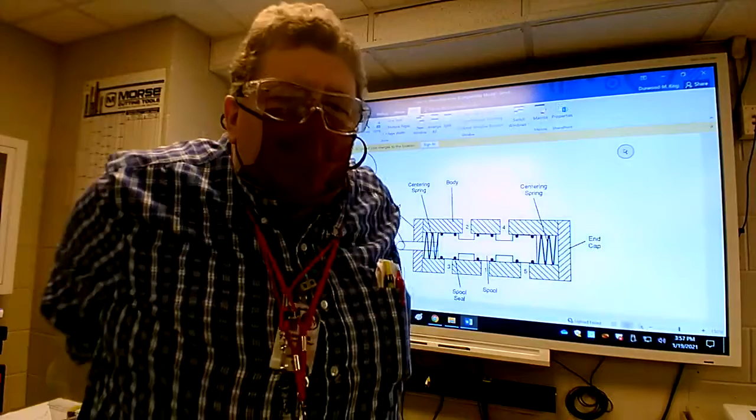This is an example of it, and it has three positions: a neutral position, and then away from the body and toward the body. So this can make a cylinder extend and retract, or it can make an air motor turn in two directions. So we're going to be taking a look at the sticker that's on here.

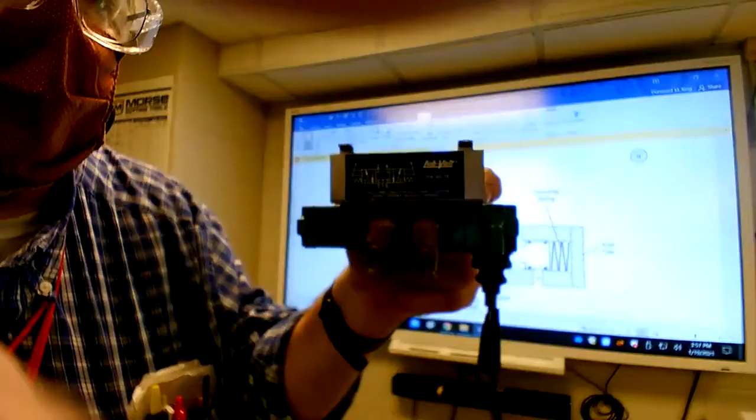What does that diagram mean? We're going to take a good look at what all of the things about that sticker mean. And what it boils down to is each block on here represents the flow path direction of the valve. How does the air flow through it and return through it in each of the three positions?

So there's three envelopes or three squares on there. You have a center position, which is when you release it, and then you have a left and right position for extend and retract. And it's going to tell us the flow paths of the air out to your cylinder or air motor and then back through the valve to the exhaust manifold, to the exhaust mufflers.

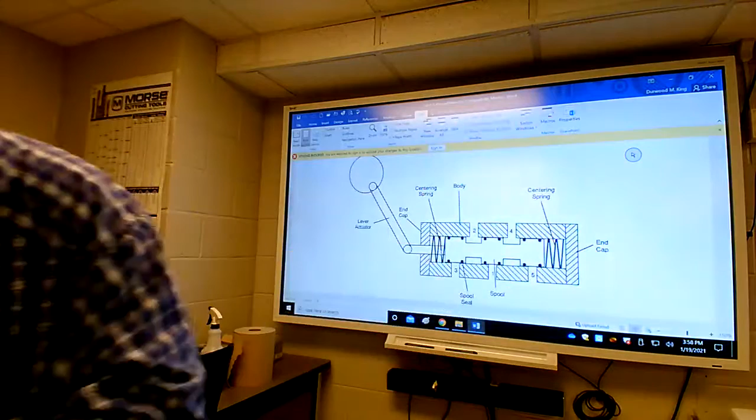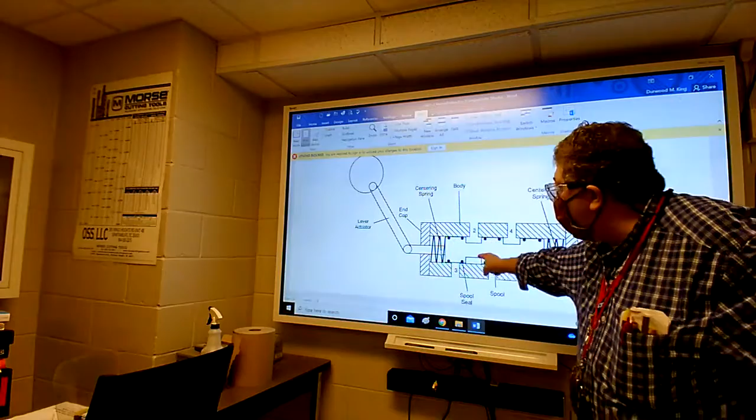That's the internal construction. And when we say it has a spool inside, that's a solid metal spool that gets shifted. And when it gets shifted, it changes what ports are connected to each other. It changes the flow path of the air.

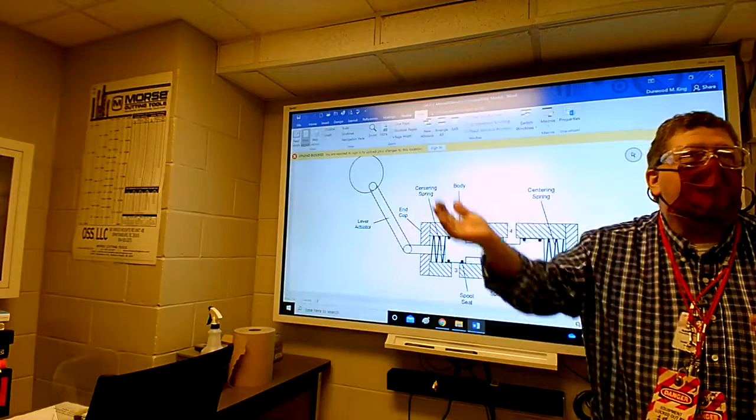Does the cylinder that it's hooked up to go out, or does it come home? And how does the air return from the other end of the cylinder back out the exhaust ports? All that stuff is determined by the position of that spool.

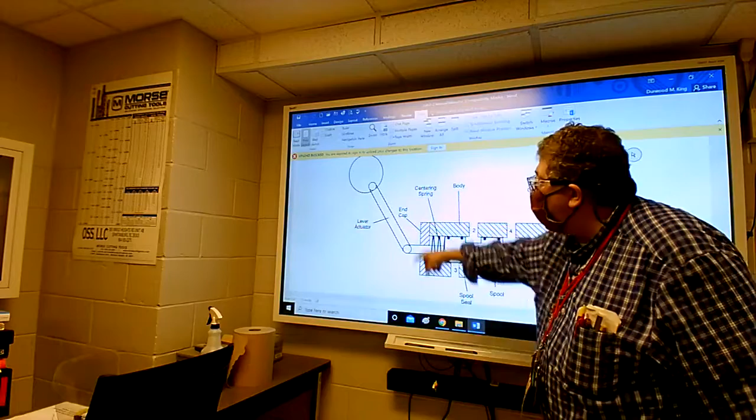And it's run manually here, whereas in labs coming up, it's going to be run electrically with coils. Electric coils are going to run it, going to control it, instead of you having to manually run it.

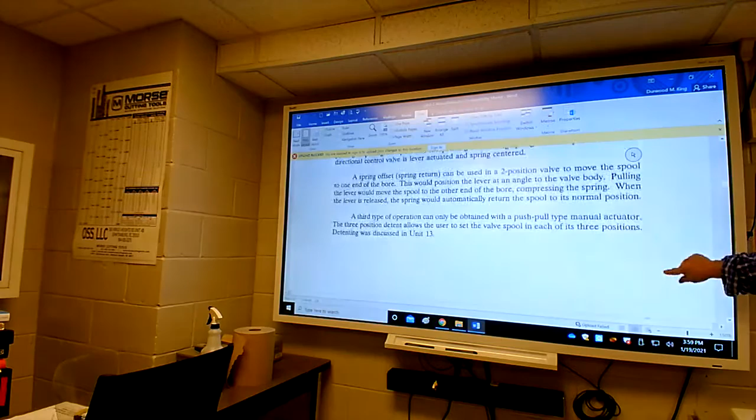Look very closely here. There are three different types of spools that could actually be in that same valve body. That same valve body can have three totally different types of spools inside of it.

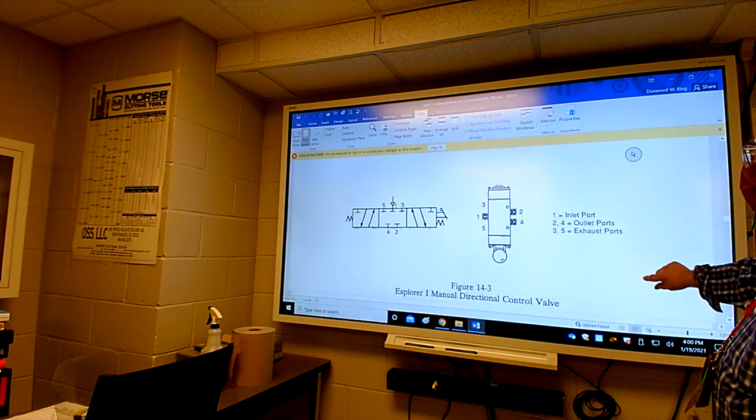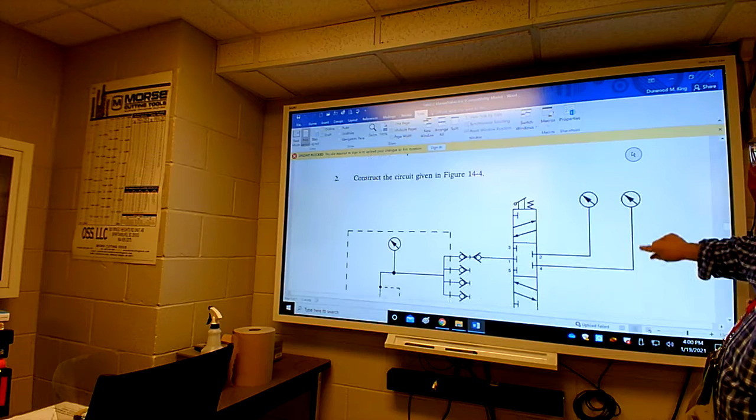So I'm flipping to your lab paper here. There's a picture of the valve that's on the trainer. That is a diagram, the little sticker that's on the valve. And this is how it's actually hooked up. This is the way you're going to hook it up.

So look closely up here. Does everybody have that on their paper where you can see it?

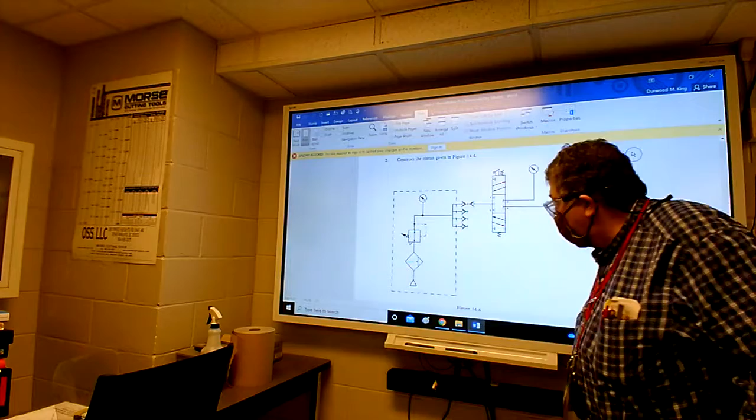Now the dashed line is the trainer unit itself, the enclosure that holds the air components. Down in here would be where the air source comes in, and each unit out there has a little compressor down in there that we don't use.

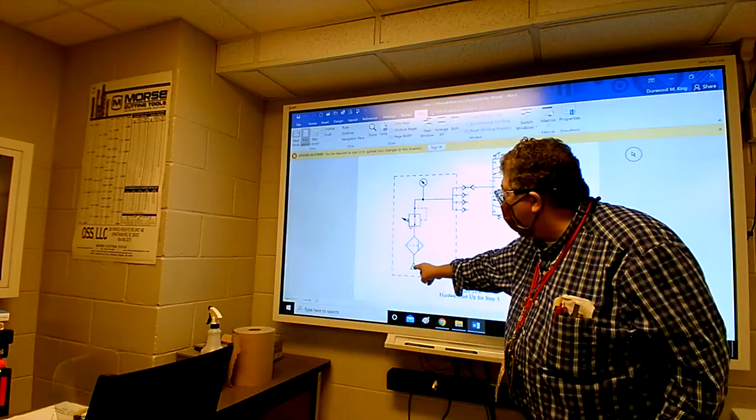We started having some problems a few years ago with those little compressors, so Mr. Meredith decided to just tie in all of those to the big compressor up here. The class he was in actually ran piping. So we're just going to cut the main compressor on that's up here with a switch outside the door, and it's going to provide the main air supply going into the trainer.

Now, on your display up there, you're going to have a filter. This symbol here, if you flip your paper to the side, those symbols are drawn vertically. Now, what I would do, just so you can make more sense out of it, take your paper and flip it like this. Okay? And when you do that, here's what you have.

That second symbol right there represents—now, when we get into chapter 2, we're going to be looking at symbols, and I've got a symbol handout to give you, but I didn't want to overwhelm you with too many symbols at one time. But what this symbol here represents is a filter unit that filters the air. The little dashed line in there would represent like a filter element, like an oil filter, but it's an air filter.

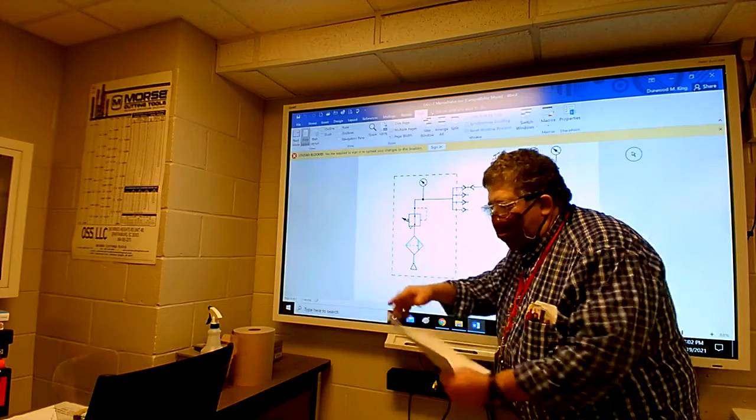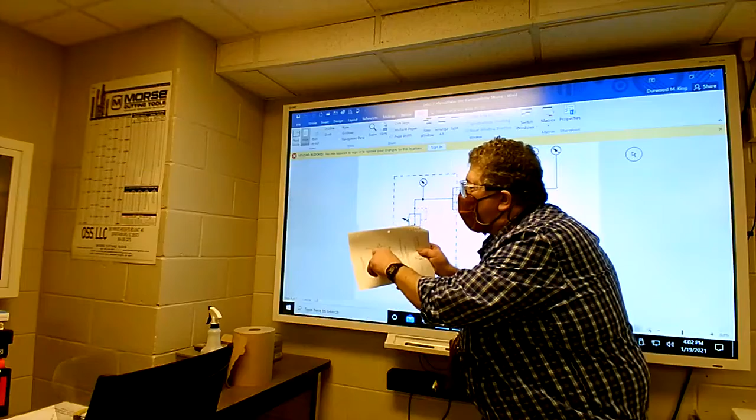Everybody's got air filters on the vehicle, right? So your air filter would be the dash line portion of it. And down here at the bottom, if you flip it like this, it's a filter that actually has a drain too. It has a valve that can be opened up to drain liquids that end up in the air. Say there's condensation in the air coming from the compressor up here, condensation in the air line. When it gets down to here, it can actually be drained out of that clear filter bowl.

It's a clear bowl that has a filter element in there to catch solids. The dash portion catches your solids, your particles, solids that are in the airline. Maybe somebody's done some pipe welding and there's some weld slag in a pipeline. So weld slag that gets carried through the lines, this dash line would actually capture that weld slag before it could get in the machine and damage our cylinder seals and stuff.

And then the bottom portion of it, if you hold it like this, is a gravity feed bowl that lets your oils and liquids settle at the bottom and be drained out so that it doesn't get into your machinery. So that's your filter there and drain. And then here would be an air regulator.

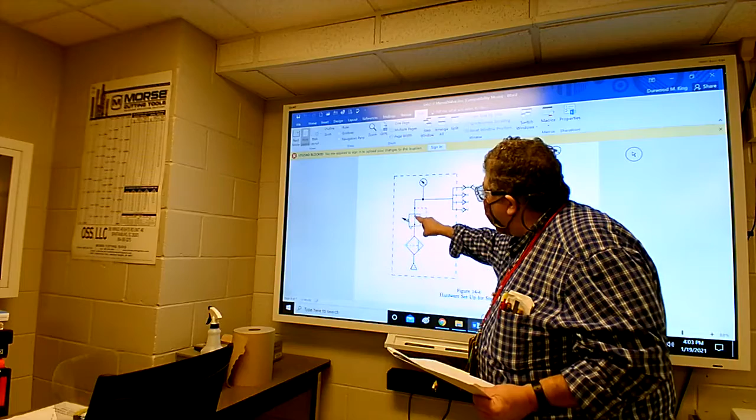So that symbol there, what it represents is when you hold it, let's see if maybe I can rotate this. Let's see if it'll let me rotate. I'm not sure if Word will let me do that. I don't see a way to rotate that image there because it's a Word document.

But what I'll do is show you over here the meaning behind that regulator symbol. How do you understand what we're looking at? It's an air regulator.

So I'm going to draw that same symbol horizontal instead of vertical. I'm going to flip the paper like this, and I'm going to draw the regulator. I'll draw the filter too. And here you have the dash line for the filter element itself, and then there goes the drain. That's your air supply coming in.

And then we go over here to the regulator. So the regulator is a box, and it's actually a thing that has a knob on it with an adjustment to adjust the air pressure that you're going to set. You're going to have to set this regulator yourself out there on the machine. It doesn't look like that physically. It's just got a knob, a black knob on it, and a round body with a knob on top. But the schematic symbol for a regulator is this.

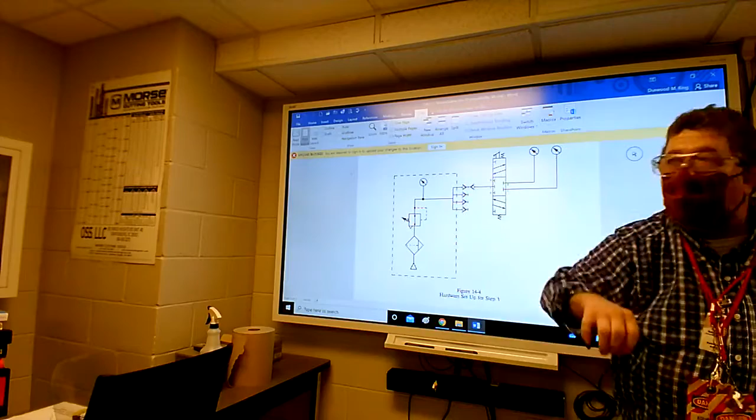So when you plug them in, those little balls open. When you put the hose on the manifold, the check ball on the hose and the check ball in the manifold both open, and air will flow out to the valve. Make sense? And if you pop the quick connect loose, both of the balls will reclose.

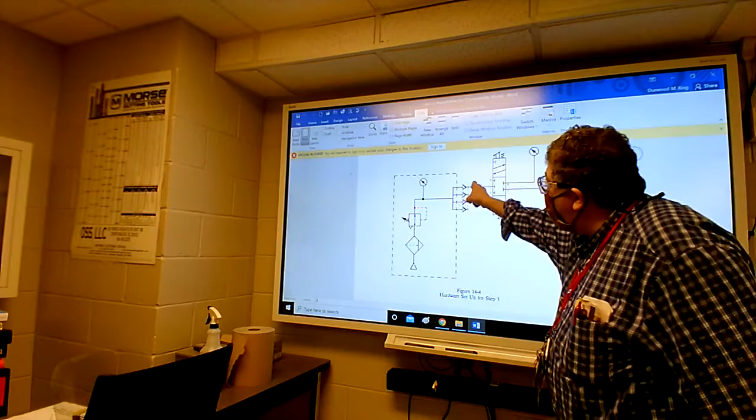You'll hear a little spurt and it'll close. Okay, so let's take a look at the valve itself.

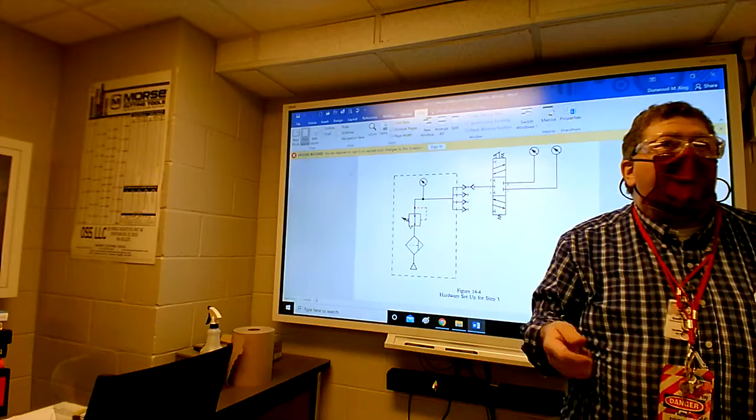Your air line is going to go into the center port, which is port number 1, and then port 2 and port 4 are going to go to some air gauges to begin with, so you can see what happens as far as air pressure. Once we go through the experiment, you can change them. You can actually tie in a cylinder and see it run a cylinder or air motor.

So you go straight out of 2 and 4. That's what I call your working ports. Go to your air lines, and then 3 and 5 are going to be open to the atmosphere for exhaust. Now, in real life, there would be some small mufflers plumbed in there, and it'll shoot through the mufflers. But here it's just going to be shooting right straight out of the ports, to the air.

Just directly right out of there. And when it's like this, it's a little noisier. When the thing runs, you put mufflers on there, and instead of it going pow like that, pow, it silences like a gun, like a silencer on a gun. Y'all know about silencers on guns. If you don't want a gun to be so loud, they put a silencer on it. Well, that's the way they do on air valves. They put mufflers, silencers, on them, and it doesn't affect the operation of the cylinder, nothing matters, but it's better on the ears.

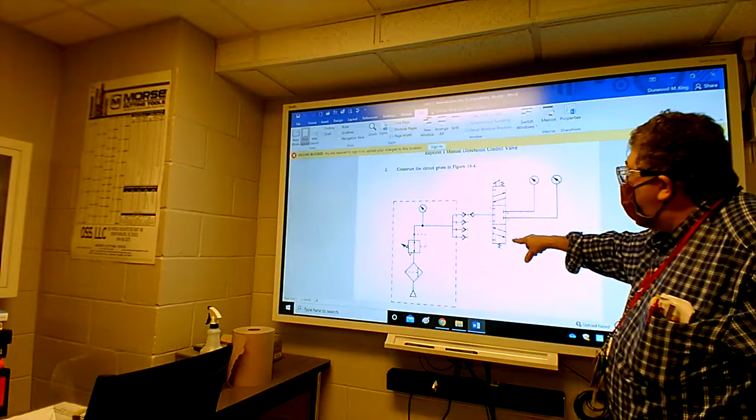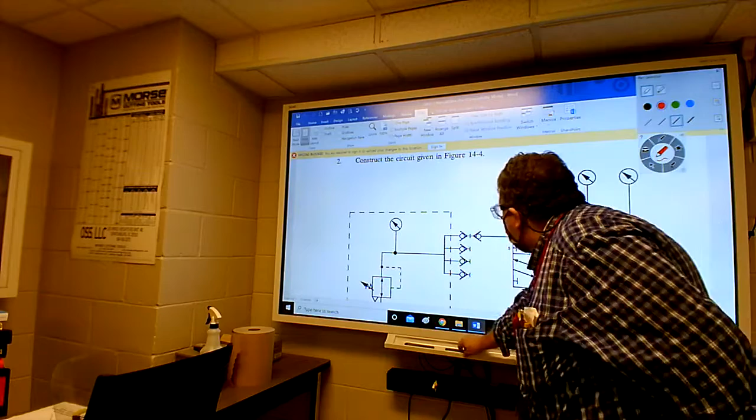Anyway, so this shows the diagram for the valve, and let's talk about what this means. So let's go a little bigger. And let's even add, I'll go as far as to draw a cylinder up there too, as well as the air gauges. So I'm going to draw a cylinder up here.

Now, so I've got a cylinder drawn in there. I've tapped it off of the lines for the gauges. And let's talk about what happens here.

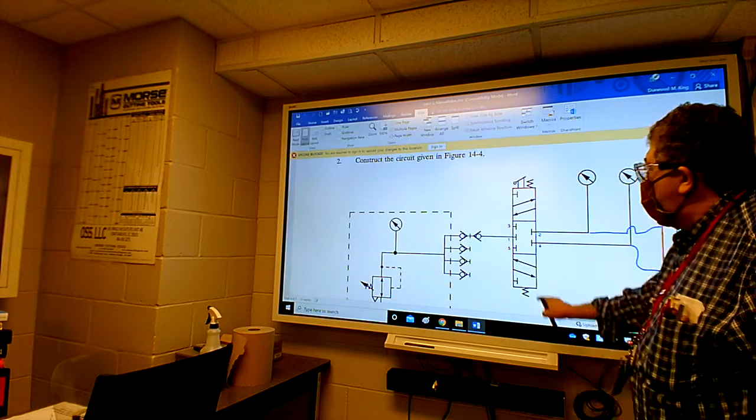Now, this valve is 3-position, and the first thing you want to talk about will be the center position, because this is called a closed center valve. On the closed center valve, it means when you let go of the stick, the springs make the spool go to the center.

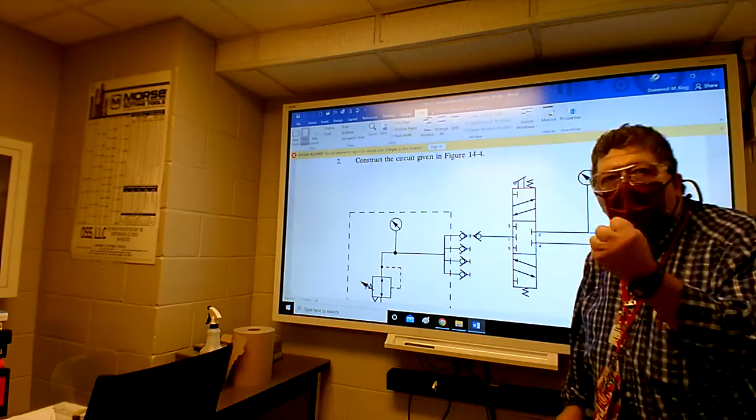And here's what happens: the air pressure coming into port 1 actually gets blocked, it's shut. And then the working ports that go out to the cylinder and the gauges are blocked too. So in the center position, all 5 ports are completely blocked, and the cylinder can't even float. The cylinder is physically locked because it can't float under load or anything. The lines are actually shut, so it's under an airlock too. It can't move. It physically can't move, can't even drift in the center position.

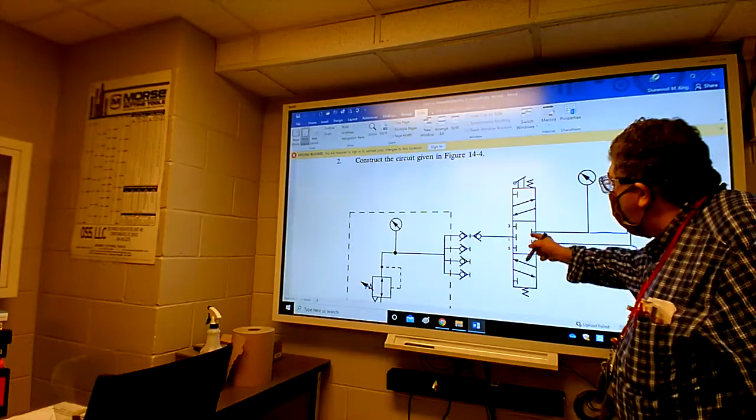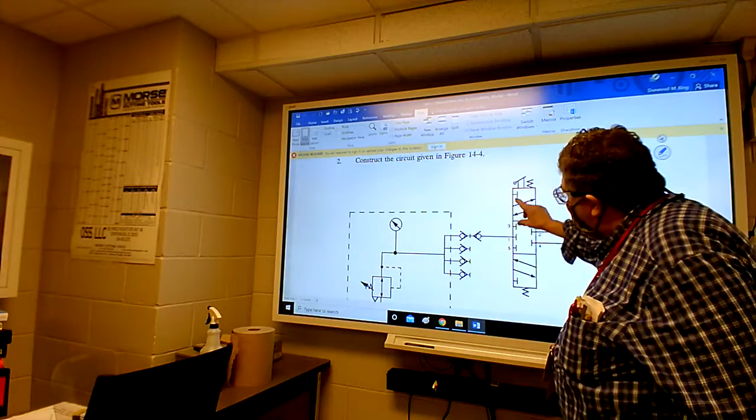Now, if you move the valve to one position, you end up with this scenario, or envelope, as they call it. So here's how you read these symbols. You take this line here, and this air line feeding that center up there. Instead of dealing with this now, you're dealing with this, not that. So let's draw it up here now. I've got the air line now shooting into here.

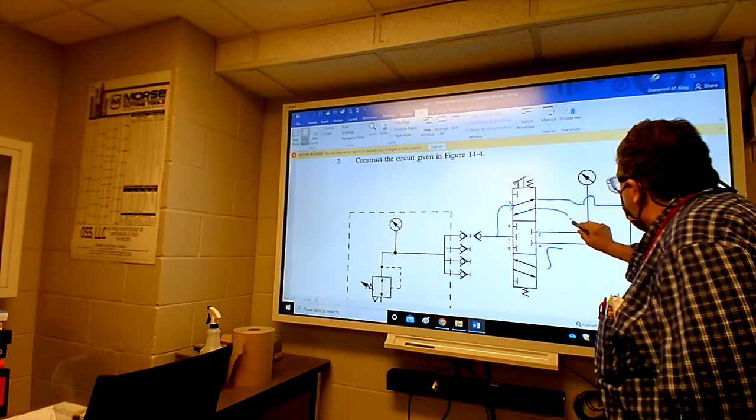Watch me real close here. So now I'm going to take your working ports right here, shoot it right over to here, and go into there. And this other one goes over to here, and now to the bottom of the cylinder.

So when you move that stick in one direction, here's what happens: the air line shoots into the center port, so these other 2 ports would be your exhaust. Those 2 outside ones, that's your exhaust, like 3 and 5. This is 3 and 5 in this scenario when you move the stick one particular way. Everybody got it?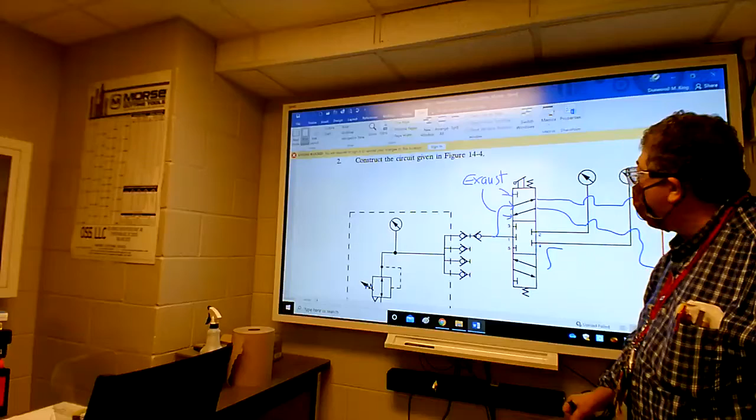So let's get rid of this, so I don't have too much clutter up in here.

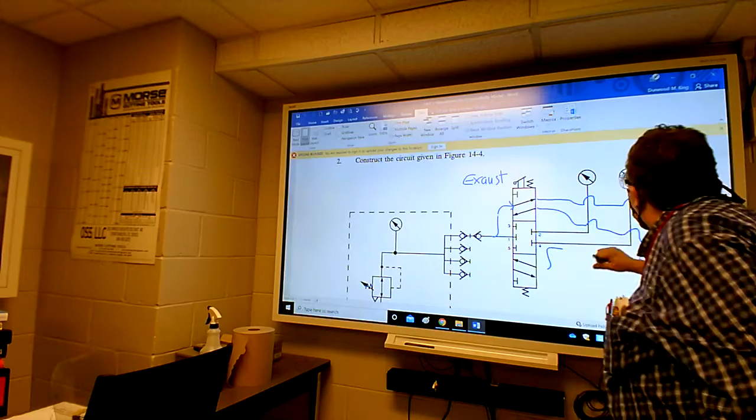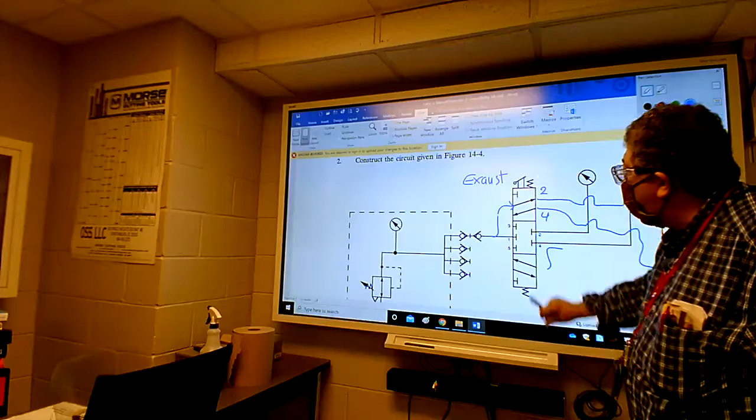Now, so when the stick is in one position, the air actually moves out of port number 2. This will be port 2 here, and then port 4. Everybody see what happened? I transferred the numbers up here to this envelope up here. And this is like 3 and 5, 3 and 5. Everybody got the idea? You just move the numbers up to here.

That's your scenario. So with the stick, let's say if the stick goes away from the valve, if you pull it maybe away from you, then the air is going to shoot here to the rod end of the cylinder. Which way does the cylinder go?

If you shoot air into here and it begins to fill the cavity, which way does the piston go? How many people say it's going to actually retract and go home? How many people say it's going to go up?

Think about it now. If the air shoots into here, you're pressurized in here, and this end of the cylinder, the cap end, is actually shooting out here to the atmosphere, out port 5 to the air. It's an exhaust. So this is the exhaust end when you're putting pressure in here. If you put pressure in this end against that piston, it's going to retract. The cylinder is going to go home, it's just going to go down.

Everybody follow? Does everybody 100% agree? There's O-rings in here that seal around that piston, and that air pressure is going to push, and it's going to have to go home.

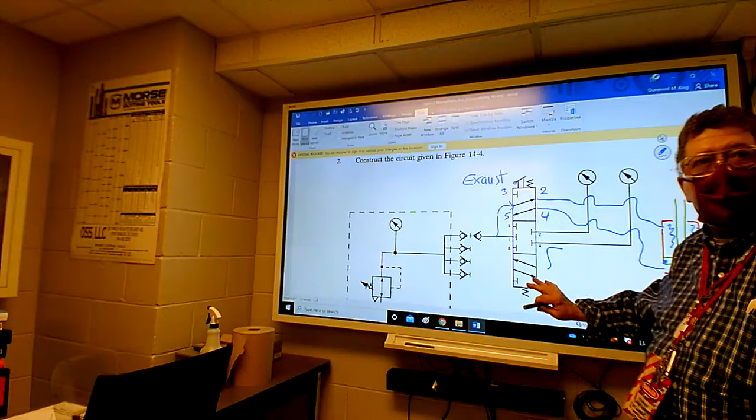So then what happens if I let go of the stick? If I let go of the handle, what happens to the cylinder? Well, if it's already home, if you move the stick away from you and it goes home, and then you let go of the stick, what happens? If I move the stick on the valve and the cylinder goes home, but then I let go of the stick and it goes to the center position, what happens to the cylinder then?

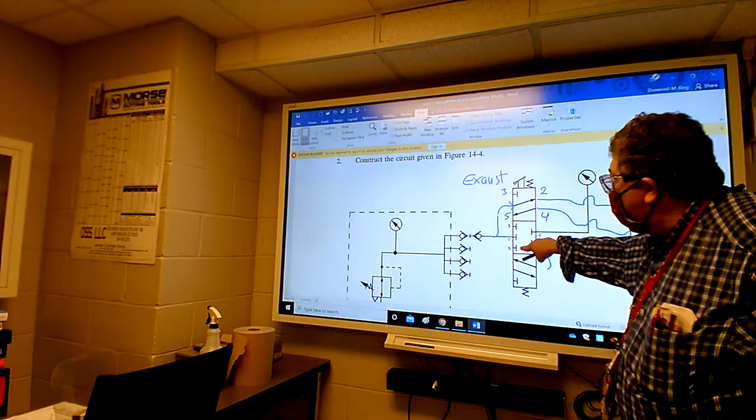Nothing, it just stays where it is, right? It stays because then you're back to this. When you let go of the stick, both of those springs on each end, that spring and that spring, make that spool go to the center position.

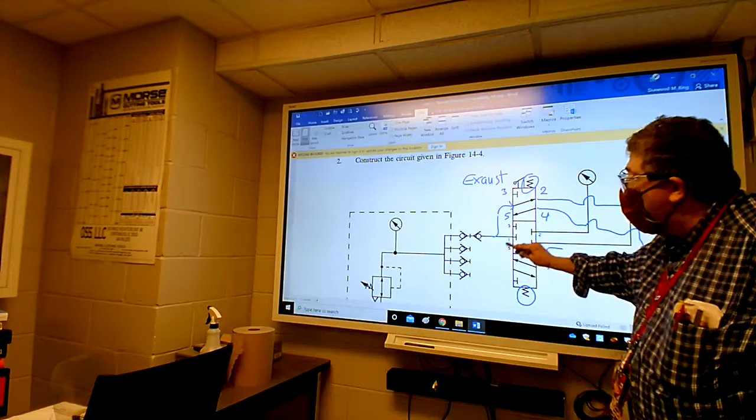And look, port 2 and port 4, these two ports are locked up, right? They're locked up, so they just stay wherever they are. And then your incoming port 1 is also locked up, blocked. So the cylinder kind of just stays where you left it. Even if something on the machine maybe goes against it, it's not going to move because the center position is called closed center. It's a closed center versus an open center or a tandem center. That's in comparison.

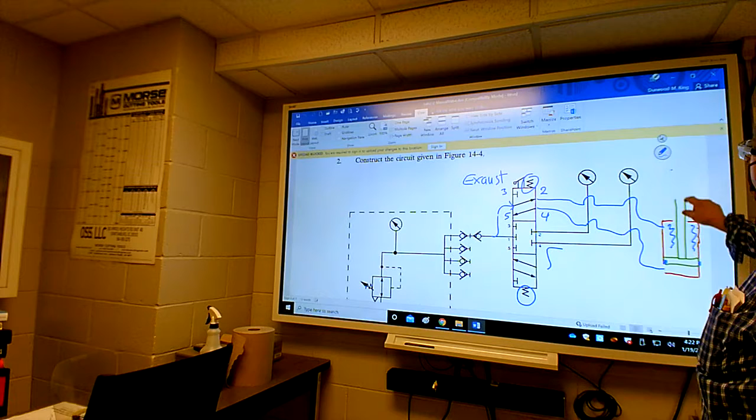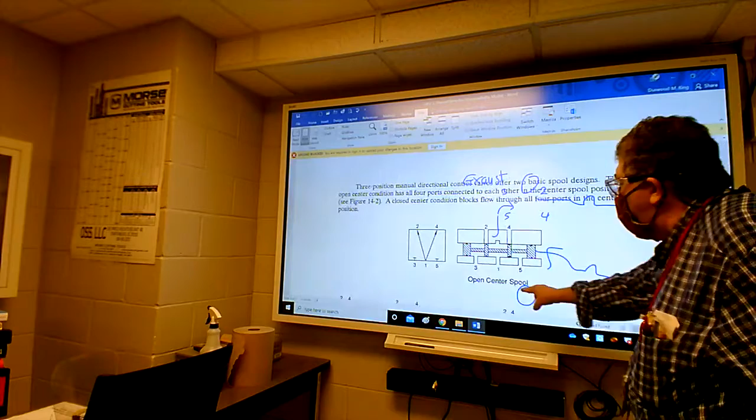I'm going to move this, and it's going to look kind of wacky for a second. If you go back to the other types of spools... let's go down. You see these other spools? That's a closed center. You got one called a tandem center and one called an open center. Now open center is a whole different animal, a whole different type of spool. It makes the machine act way different whenever you let go of the stick.

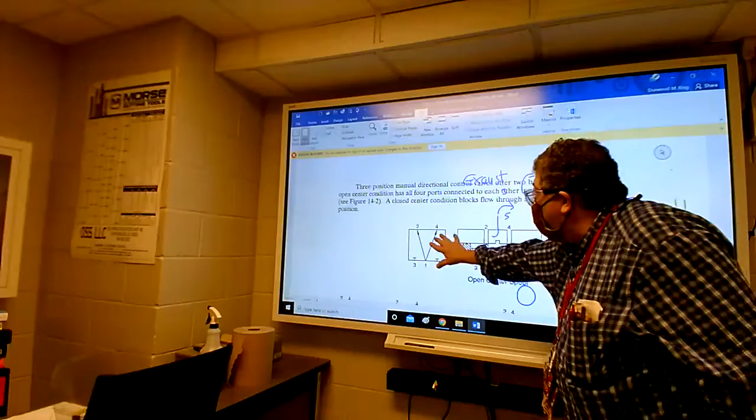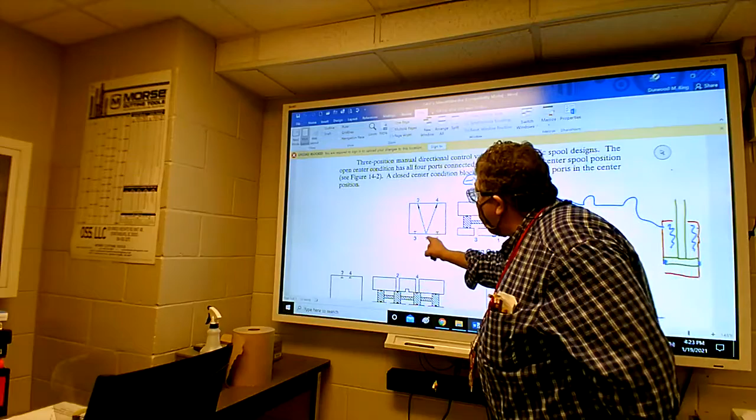So just to show you, for instance, on the open center, the air pressure coming into port one, when you let go of the stick, here's what happens: the air pressure actually shoots out of both of your working ports equally, and it shoots to both ends of the cylinder, putting the same pressure on both ends. So the cylinder would basically be in a middle position, which is a rare type of valve to have an open center, but in some cases they have to have it for the machine requirements.

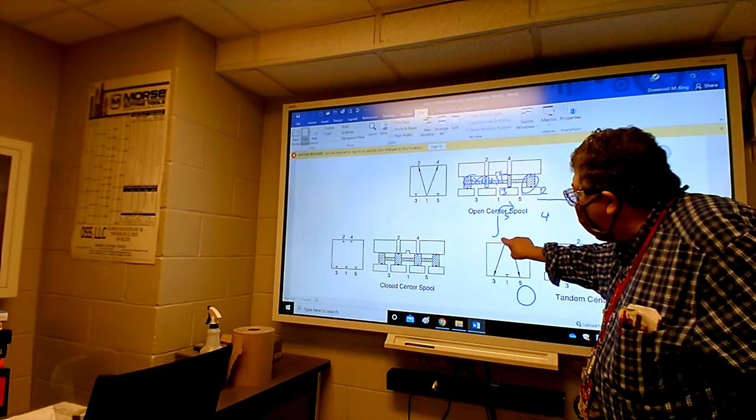And then if you have a tandem center, look at here. Whenever you go to the center position on the valve, you let go of the stick and it floats to the center, your air pressure coming in is actually blocked. And then both of your working ports that go to your cylinder actually exhaust at the same time. So the cylinder is in complete limbo, in other words, it's loosey-goosey, okay? The load out there can be pushed and moved.

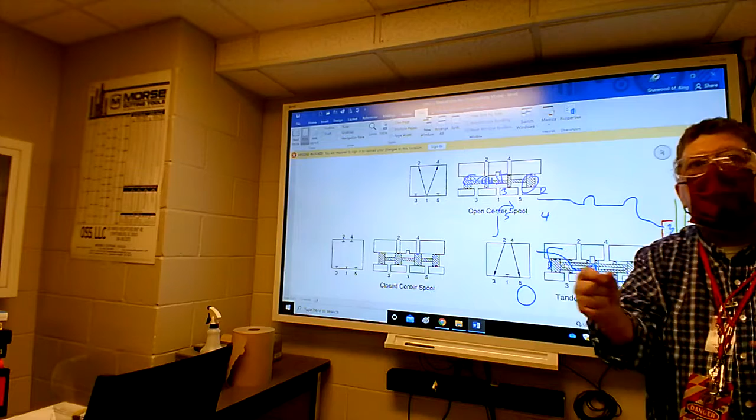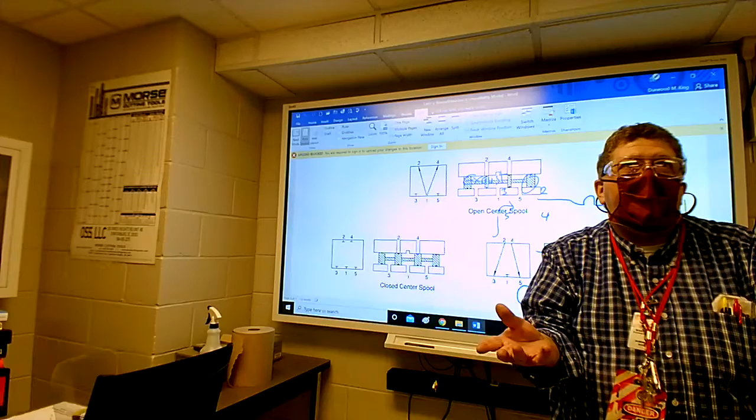Now that could be a case where some machines have to be that way for emergency. Maybe somebody hits the E-stop and that valve goes to the center position. Maybe they want it so that mechanical thing would be actually in limbo, and it could prevent a jam up or make a machine relax instead of staying where it is. Maybe if it's a machine prone to jamming up, they may use a tandem center type spool valve, so that when they hit the E-stop, that load could actually not be under any tension.

You know what I mean? It would not be under any pressure. I'm going to tell you something I did one time, the first time I ever ran into this, it was a real shocker on me.

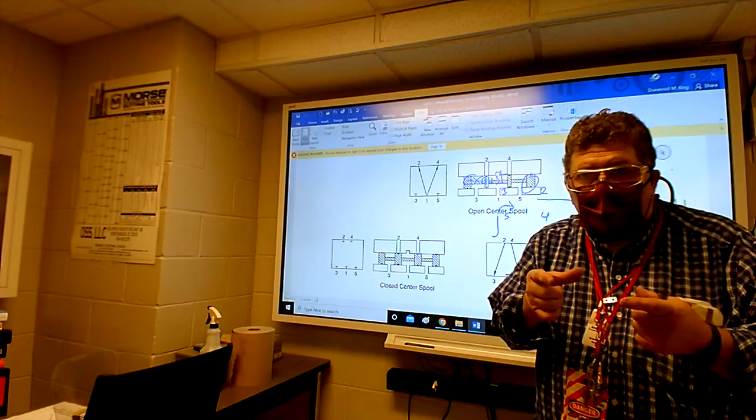We had a machine that had a particular type of valve. It had a closed center valve, and the machines we had were used to having closed center valves. We got a new machine in from Ohio that had a tandem center valve. I believe it might have been this kind right here.

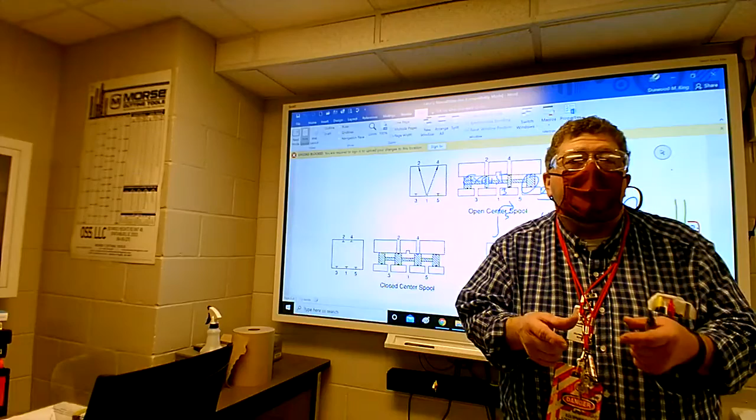So this new machine comes in. I didn't know that's the type of valve that was on there. After so many months of running that thing, that valve went bad. So I looked at the valve from a distance and said, well, we got one of them on the shelf. So I went and got the valve that we had.

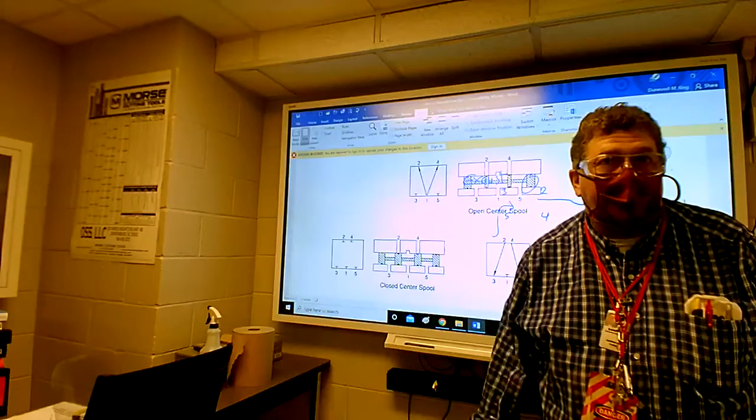It looked just like it, but the diagram was different. I didn't read the diagram, in fact. I was used to this, and I didn't even know there would have been another kind of valve coming into the plant. So I went and got the other valve, and I bolted it on there.

And the machine acted squirrely. I said, man, it's worse now. What have I done? You change something out, and it got way worse. The machine would just drift. I said, man, what's going on now?

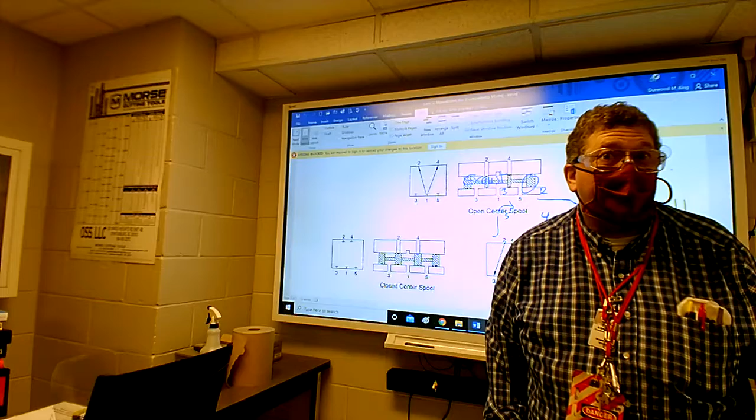So I got the two valves and looked, and said, it's not even the same kind of valve. And we didn't have another valve on the shelf like that. We had to wait overnight to get one in to fix the thing, because we just didn't have one on the shelf.

So that's kind of my thing: physically, the same valve body would bolt on, and you wouldn't know. In other words, you could put the wrong kind of valve on there. It's the same valve body, but internally the spool is different, and it's a different part number. You know what I mean?

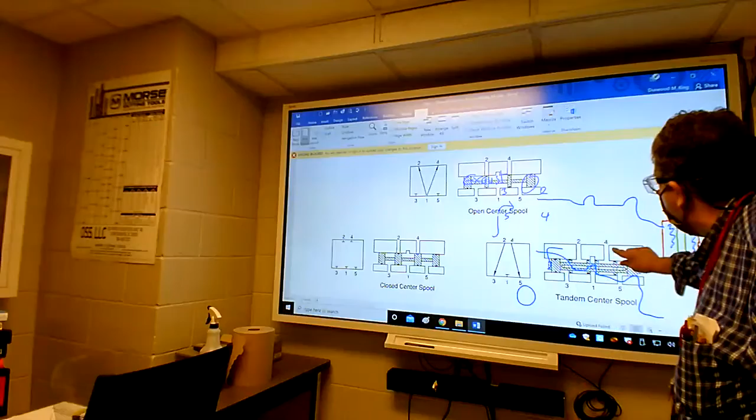And the way you would know when you go to replace a valve, here's what you want to look at: the sticker on there that shows you the center position, and make sure what you're putting on there has the same type of center position. Because that was a very surprising thing that happened there.

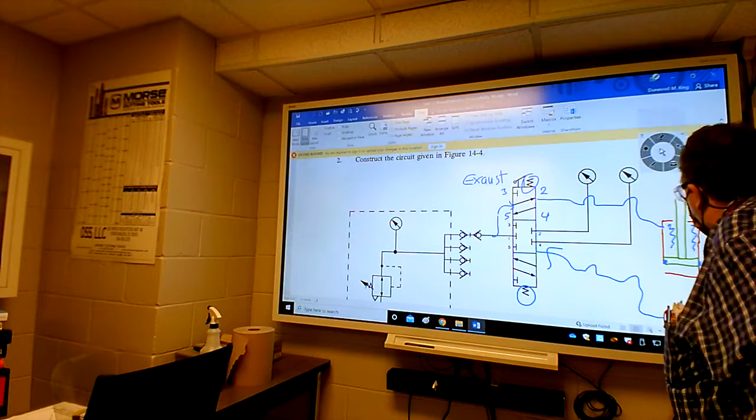Okay, so back to here. We were sitting here before I messed up my lines. So everybody agreed there that takes it home. Now let's go to the other scenario. Let's take the stick, pull it back toward the valve. So we're going to erase these lines.

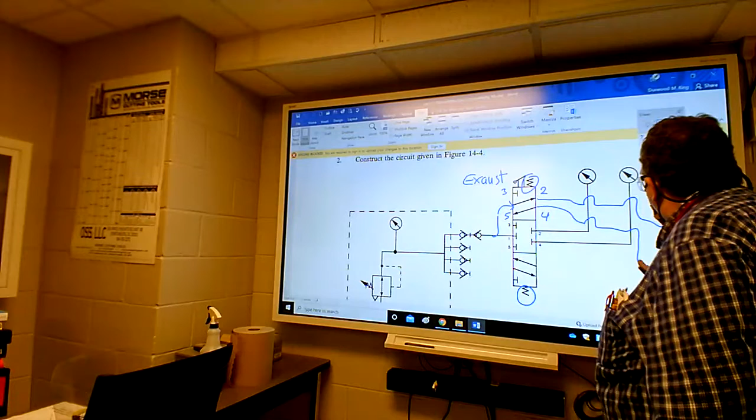All right, yeah, that's still safe. We're going to erase the lines here. And so where do we go now? We're going to go down here, right? We're going to choose this scenario. So you go to here.

And we take this one right down to there, because these two are going to be 2 and 4 now. And then your airline shoots into here. And then your exhaust, this is 1, that's your air inlet, and then 3 and 5 are your exhaust. So there goes exhaust port 3, exhaust port 5.

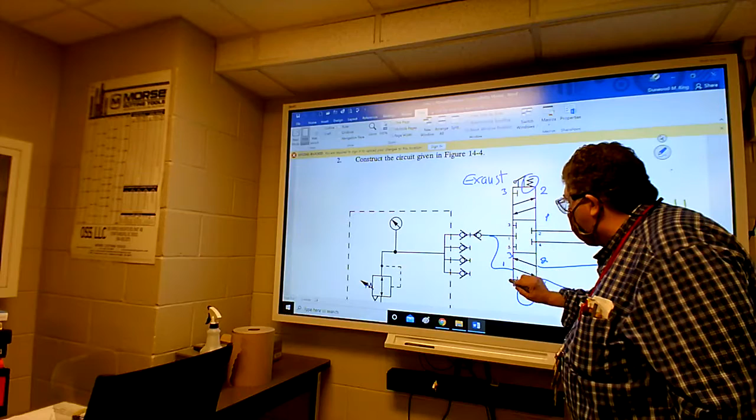Everybody follow? This is a key thing. If you know how to read this, you're going to be ahead of the game wherever you work at. And we X that out. So we got air pressure coming into port 1, and we got the stick pulled toward us, and the air comes down to here. So let's get that out of there.

Let's go back here. Oh gosh, yeah, cylinder here. Mess myself up. So we're shooting air in the bottom end, right? So we're filling up the cap end of the cylinder underneath the piston. And so what happens to the cylinder? Cylinder goes up, right? It goes up.

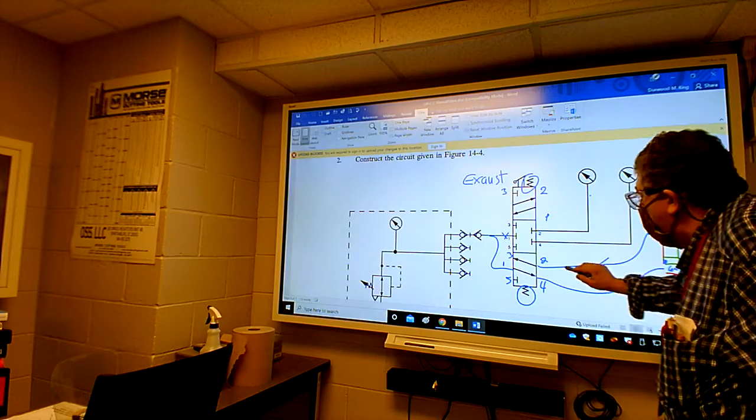And now the air that's actually in here, what happens to the air? It has to go somewhere, right? It comes out of the exhaust. It comes right out of here, and it comes right back to here, and it shoots out of what? Port 3. Exactly. You have air shooting right out of there, and it'll just go. As the cylinder moves, it's going to go, shoot, and then it'll quit. You'll hear it go if it's in slow motion. Make sense?

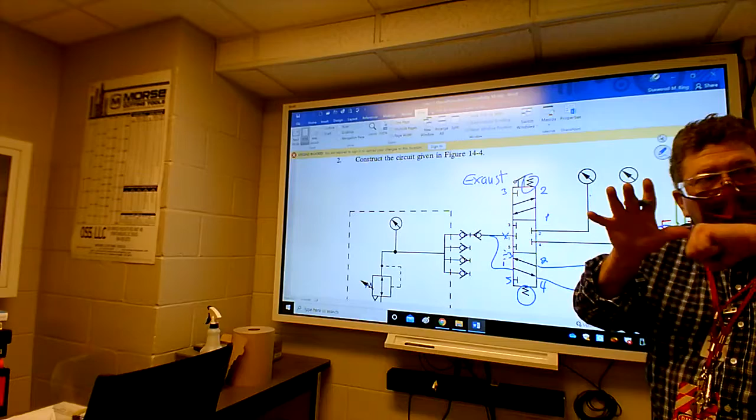Here, your exhaust vents to the atmosphere because it's air. If this was hydraulic, there would be a return line going from here back to a reservoir, and it would take your fluid from the rod end, the actual oil that would be in here, and that oil would have to go back and dump right back into your reservoir.

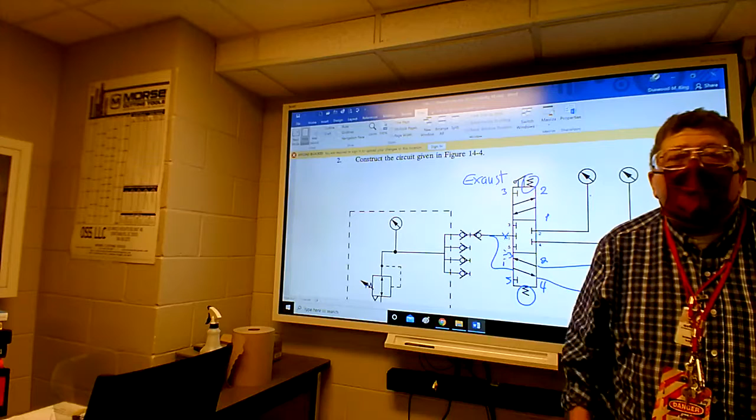That would be your return line. So when we do hydraulics, which is the second half of the class, the second 7 weeks, you're going to be dealing with hydraulic hoses, and you don't shoot to the atmosphere for sure. It has to go back to the reservoir. So that's the difference between returning to atmosphere versus going back to a tank.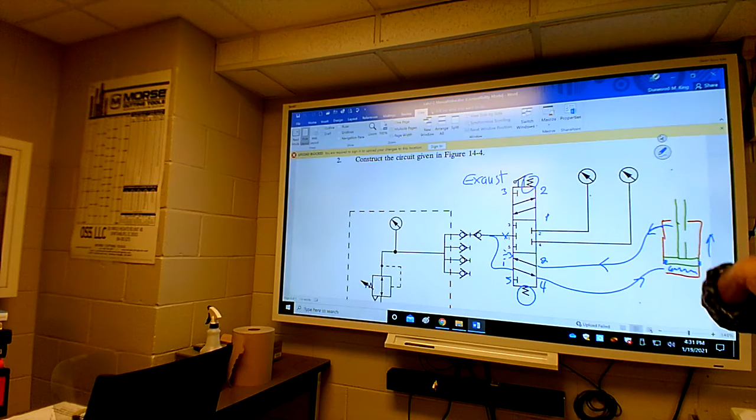Hydraulic is called a closed system because it's fluid, and it has to be closed. Where this is an open system, it pulls in air, cleans it, uses it, and then shoots it right back out into the room. So it's an open system.

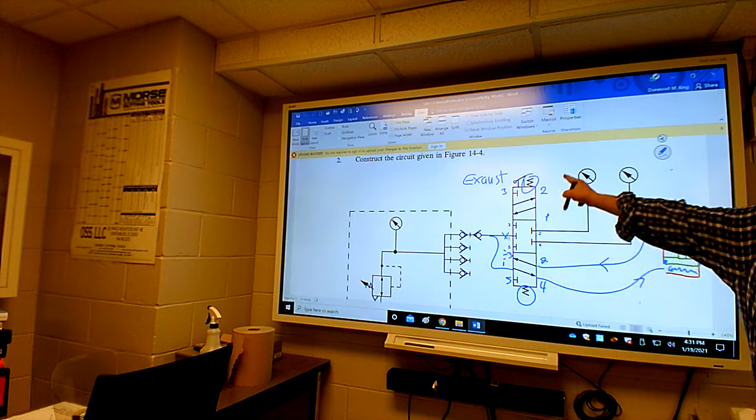Does everybody understand how to read that valve? Okay, so we can take right now. Let's go to the trainer, let you set it up, and let you do your lab. I'll come by and see you work it. And there's questions that you're going to answer in the lab. So we got time to do it.

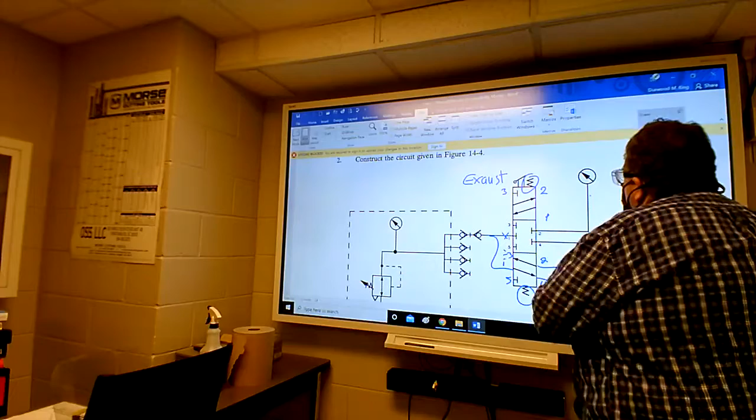If you watch, it's telling you to connect it the way the diagram showed, and then it wants you to write down the pressures of your system gauge, your port 2 gauge, and your port 4 gauge. So there's going to be 3 air gauges there. You're going to write down what they are.

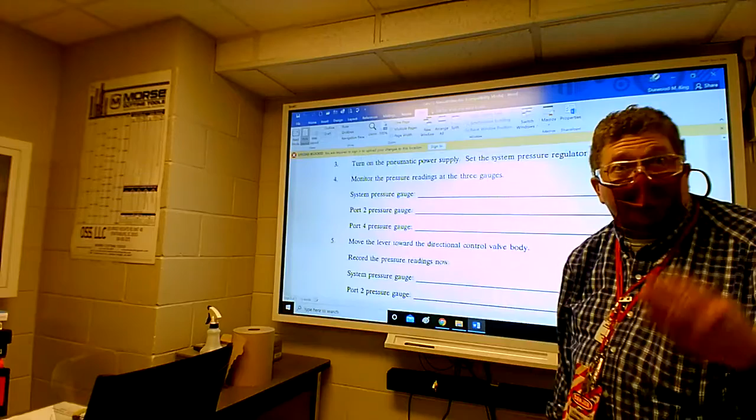With the valve in home position, let go the stick. Then you move the lever toward the valve body and hold it. Notice what your 3 pressures are. Write those down. Then move the lever back away from the body, and write those 3 pressures down, and explain what you saw.

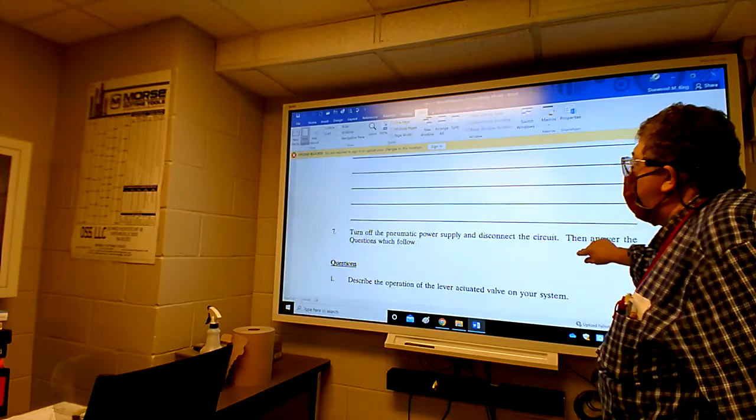Explain it in terms of, with that stick moving that spool inside, it changes the flow path through the ports. The spool does it. You're manipulating the spool inside the valve. Everybody follow? So you do all of that.

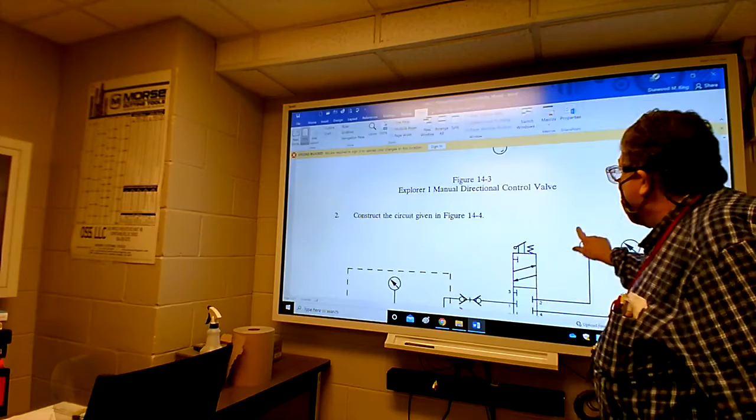And then the other questions, I'll help you with those. There's information in the beginning of the lab to help answer those questions, but we're going to discuss all of that. Okay, so we'll go ahead and do it. We got right at 30 minutes, so we got time to knock it out.

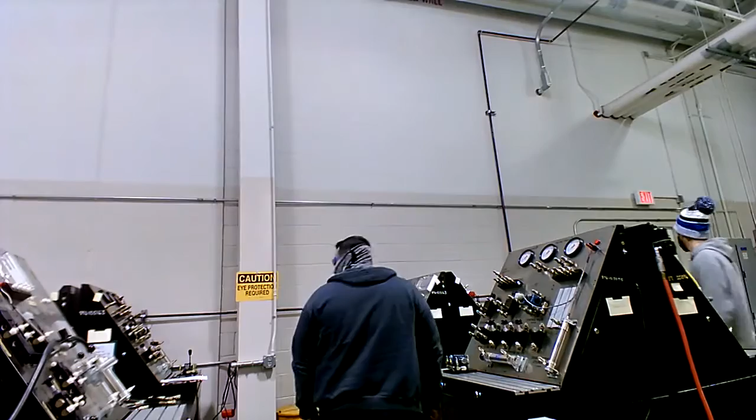I think there's actually some over here. Do you want these safety glasses? Make sure if you look on here, put your glove on, make sure you get back here. Don't have one right up here. Right, you gotta have a mask too. Anybody need safety glasses? Got the blue or they got the clear. Make sure I get these back. I'm gonna put them right over here on this table. If you need a mask, I got the mask.

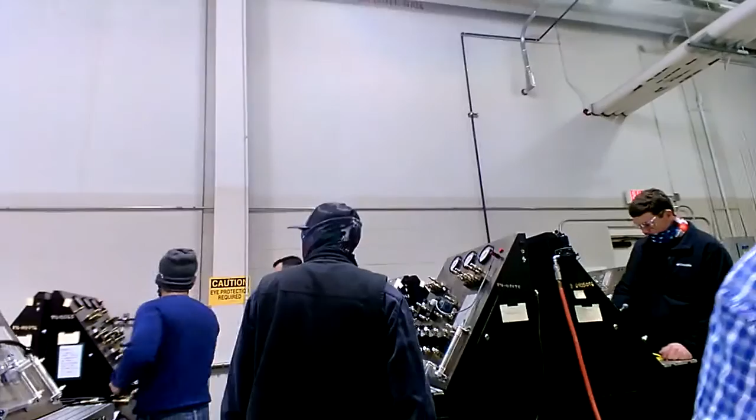We gotta get some other rings. He's got some other rings that are dry rotted.